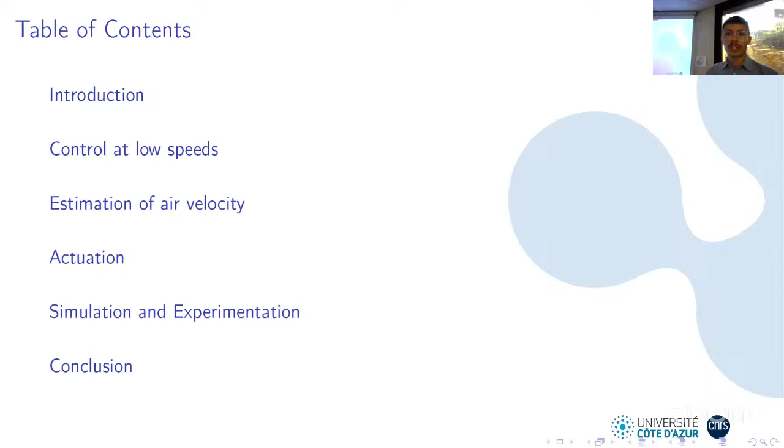This presentation will begin with a brief introduction of the topic we're going to address in the thesis. Then I'm going to give an outline of the contributions, then I'll dive into each one of these contributions. This will be followed by a presentation of the results we obtained along the thesis with a short video. And finally, I'll give a conclusion with some remarks for future work.

So what are convertible vehicles? Convertible vehicles are basically aircraft that can hover like helicopters, but they can also fly at high speeds like fixed-wing aircraft. So they basically use their wings like airplanes in order to generate lift when flying at these high speeds.

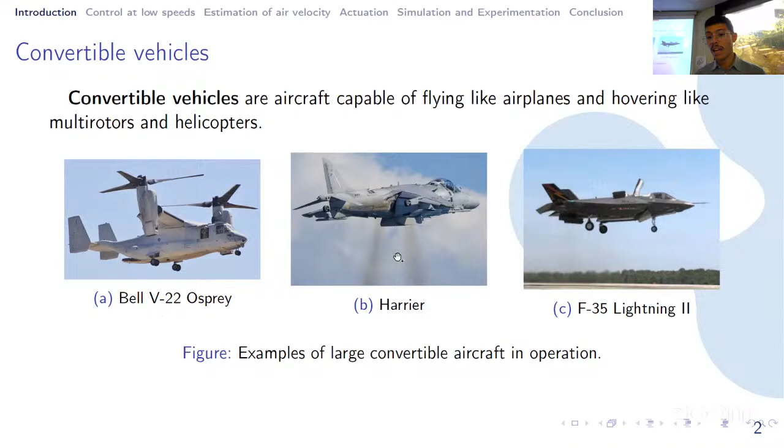These aircraft have been developed since the 1950s. However, very few of them have reached the operational phase. So here are some examples: the Bell Osprey, the Harrier, and the F-35 fighter jet.

Nowadays, with the growing drone market, a large amount of convertible vehicles are now available to the general public. These convertible vehicles come in all sorts of configurations. We can maybe classify three big groups here today.

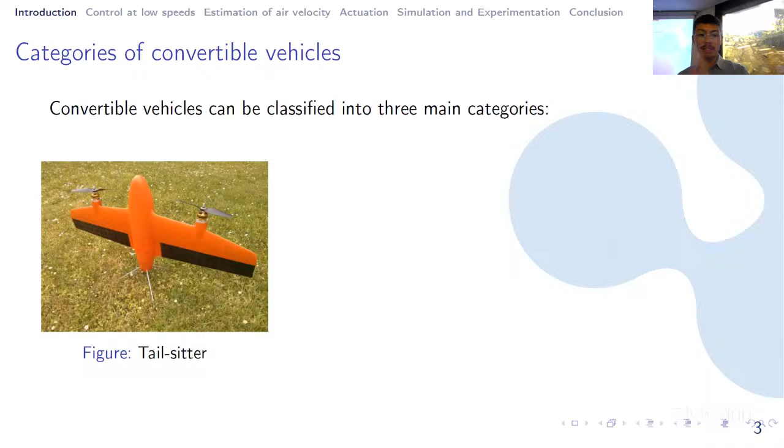This classification will vary in how these convertibles convert from hovering flight to fixed wing flight. Our first group is the tail sitter. These aircraft take off while sitting on their tail in this vertical position, and they convert to fixed wing flight by tilting the entire body from vertical to horizontal position.

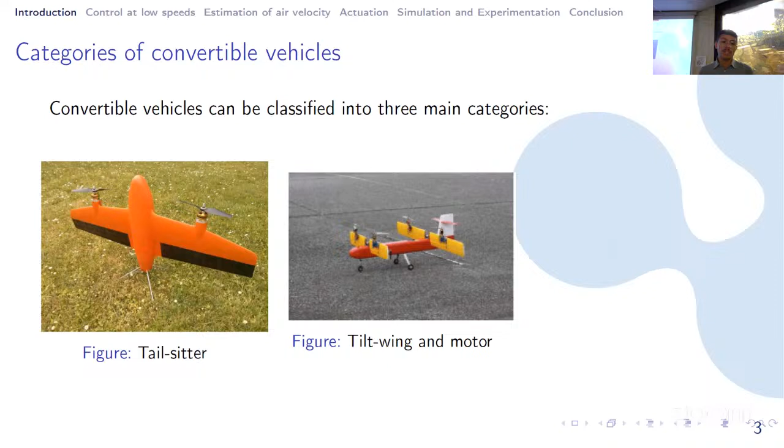Another group of vehicles are the tilt wing and motor aircraft. These aircraft have structures of the wings and motors that can tilt jointly. So they begin takeoff in this vertical position, and then they also convert to the horizontal position. But the difference is that they can keep the fuselage level at all times.

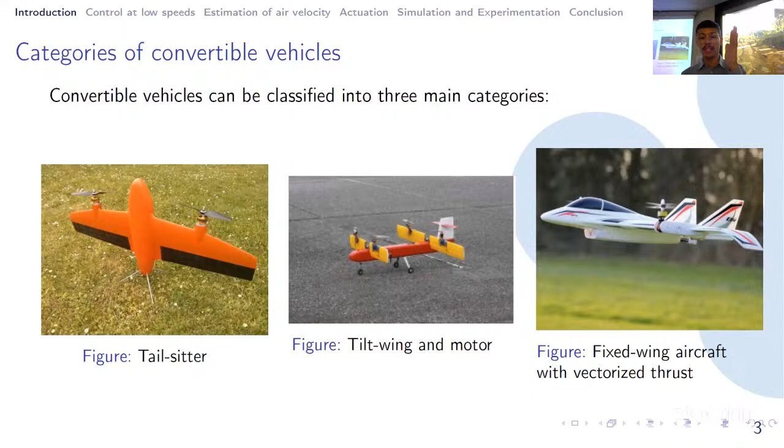And finally, the class of vehicles that we're interested in here today, which are convertible vehicles with vectorized thrust. These are basically fixed-wing aircraft that can produce a thrust vector in the aircraft's vertical plane. To give a better idea of this, a large class of these vehicles are actually tilt rotors, like the ones I have here on the right. These are the drones we used during this thesis.

So what are tilt rotors? They're aircraft that have motors that can tilt, meaning they can change the direction they're pointing to. And the sum of the forces of all of these motors will produce a thrust vector in the aircraft's vertical plane that we will represent here today by this vector T, and it will have an angle in that plane described by this angle theta.

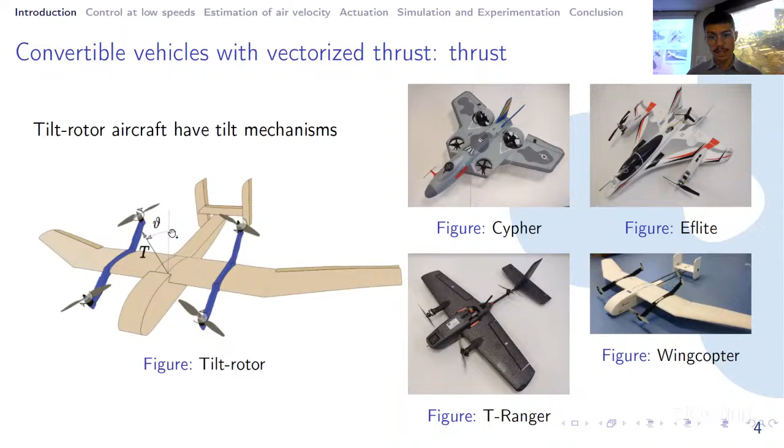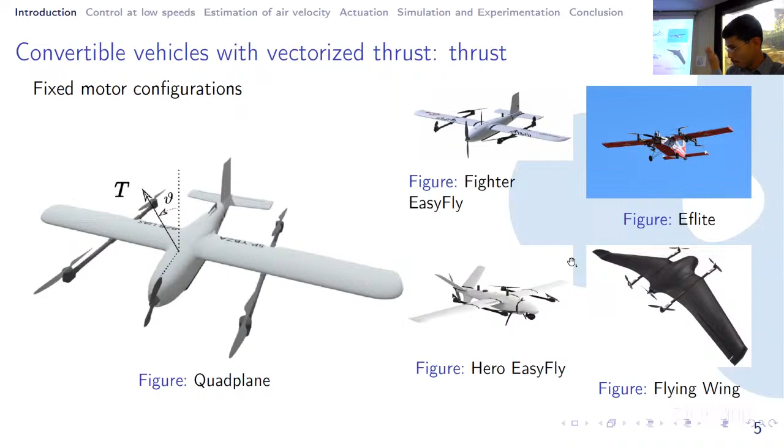Another type of convertible vehicle doesn't have tiltable rotors, only fixed motors, but they're fixed in different directions in the body frame, like the quad plane I have right in front of us today. In the same way, by coordinating the forces of all these motors, we can produce this thrust vector in the aircraft's vertical plane. There are other examples of quad planes that I put in the image you can see on the right.

Other than the thrust force, convertible vehicles also produce an aerodynamic force. Traditionally in aeronautics, this force is decomposed into two orthogonal components. The first one is in the direction of the air velocity, and it is actually opposed to it.

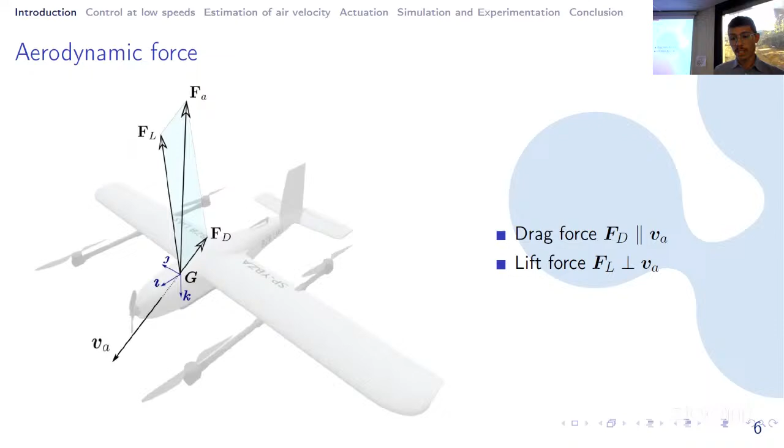So this is the main force component responsible for overcoming the weight of the aircraft while it flies. So among the various characteristics of an aerodynamic force, one well-known one is that it varies with the square of the air velocity, that is, the norm of this vector VA here. And another important characteristic is that it is highly dependent on the orientation of the aircraft with respect to the airflow.

So this orientation is usually described using two angles. A first angle is the angle of attack, which will be quite important for this presentation today. The angle of attack is related to the vertical component of the air velocity in the body frame, this component over here. And then we have the side slip angle, which is related to the lateral component of the air velocity in the aircraft's body frame.

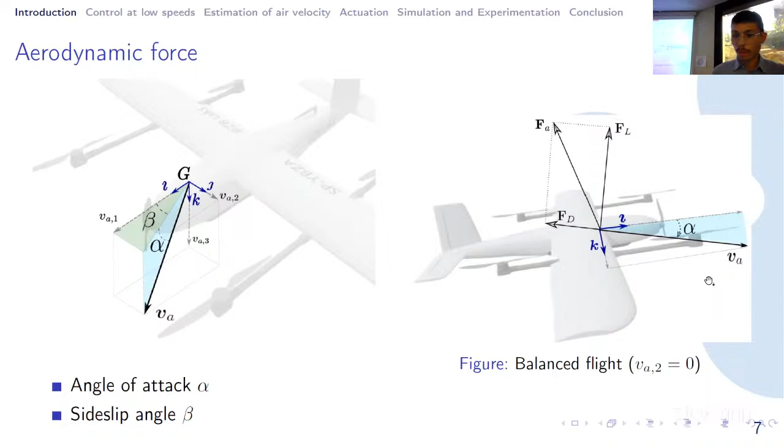Most aircraft with wings are actually designed to fly in a balanced flight condition. In this condition, the lateral component of the air velocity is zero. And while flying in this condition, all of the components of the air velocity and the aerodynamic force are found in the aircraft's vertical plane, as shown here in this image, and they will be mostly dependent on this angle of attack.

So a big topic in the research of convertible vehicles is the transition between the hovering phase and the cruise phase, where we're going to have the wings working to lift the aircraft. Most approaches involve two separate controllers, one for the hovering phase, another for the cruise phase. And the transition is just done by abruptly tilting the thrust vector from the vertical position to the horizontal position.

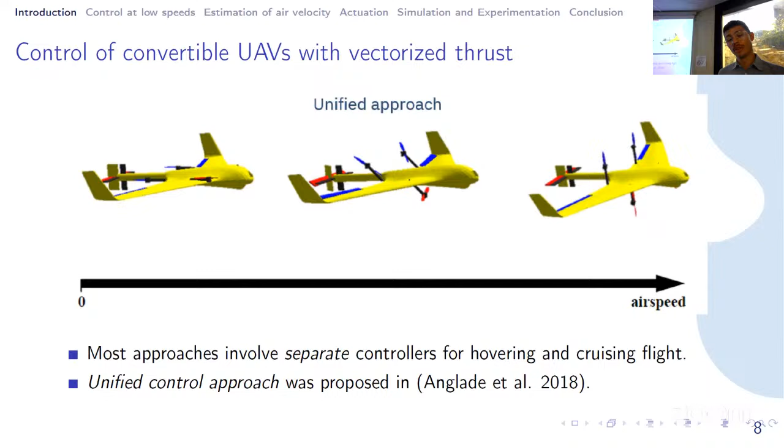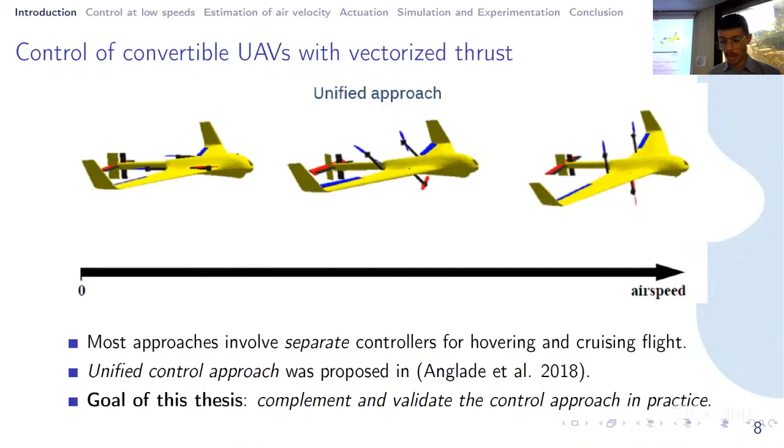So modeling the aerodynamic force for control is quite complex, especially for convertible vehicles, because these aircraft go through conditions that are quite different from fixed wing aircraft. They can be submitted to high angles of attack, and modeling the aerodynamics in those conditions is especially difficult. Another thing is that these models will have other uncertainties coming from the flow of the motors on the wings, which creates a lot of uncertainty that makes it quite difficult to model in practice.

So in order to deal with this, the approach proposed in 2018 here in the lab uses a simplified but yet representative aerodynamic model to model the aerodynamics of the aircraft. This approach applies to all orientations that the aircraft can have. This is quite different from traditional linearized approaches that use the lift and drag decomposition, which can only be applied at small flow angles or small angles of attack. So with this approach, we can have all of these orientations, and it was initially applied to axisymmetric vehicles such as rocket-like vehicles, the ones I represent here.

An important thing about this approach is that it applies well to bodies with symmetry. It considers that the body we're using has some symmetry properties, and that's actually where we get this applicability to all orientations. For example, in the case of a rocket-like vehicle, we can apply this cylinder idealization to make this assumption on the shape of the aircraft. In the case of an aircraft with fixed wings, the idealization used is a disk representation like the one I show here. This disk idealization is used to represent the aerodynamic force of the aircraft in a balanced flight condition.

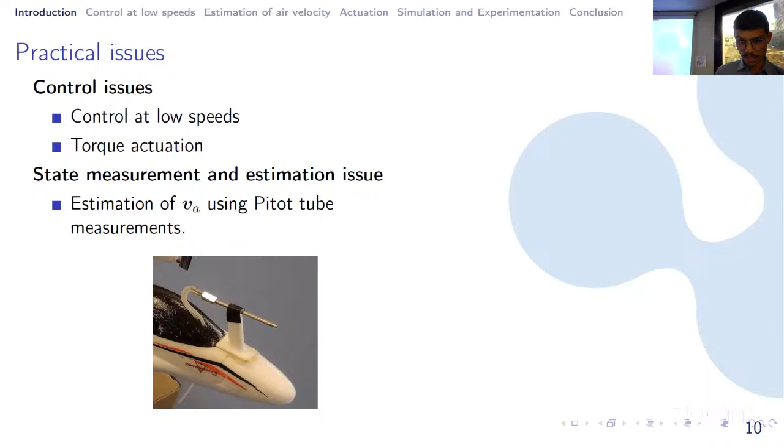As I said, the control approach depends on the determination of the air velocity, so we need to have that estimated or measured on board. Unfortunately, on small aircraft like the ones we see here, they all have this sensor, called a pitot tube, which can only measure one component of the air velocity. That means the other two components must be estimated, and we still needed to analyze better in practice if we could estimate this air velocity well for this thesis.

Finally, one of the goals is to validate the approach in practice. This is usually done in two phases. First we worked out a lot of simulations to evaluate the robustness of the controller, and then in a second phase we take this to flight tests where we really test it in a real-world environment. During these tests, we want to evaluate the robustness of the aircraft, mainly for modeling errors.

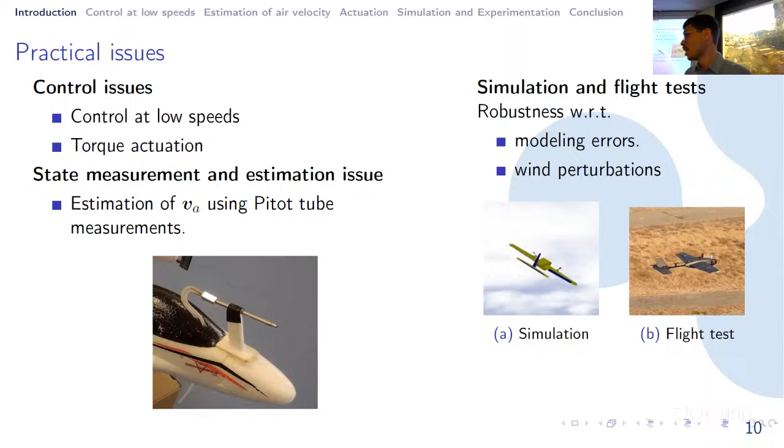As I said before, we're using a simplified model for the aerodynamics. Another thing is that these convertible vehicles go through a large flight envelope, so the conditions of flight can vary a lot. For smaller aircraft like the one we have here, another important thing is to be robust to wind perturbations, since a small wind speed, say 7 meters per second, can really change the phase of flight of the aircraft.

So now to dive into the first contribution, which is the control at low speeds. In order for us to understand it better, I'm going to make a recall of the approach proposed in 2018.

Back then, to simplify this presentation, we're going to assume we have two types of inputs. The first input is the thrust vector of the aircraft itself, defined by this tilt angle theta and this thrust intensity T. The second type of input will be the aircraft's orientation, described by these vectors I, J, and K. The underlying assumption here is that we know how to create the torques to make the aircraft's orientation converge to a desired orientation.

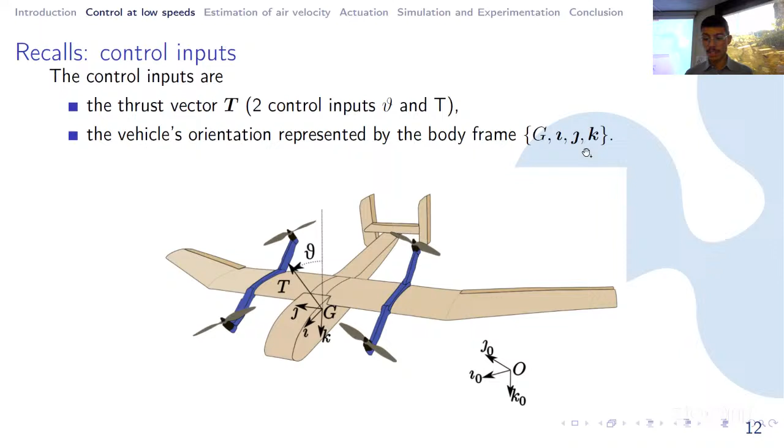Please consider for the next slides that these I, J, and K's here are actually the desired vectors of the desired orientation. So if we write out the Newton equations for a convertible vehicle, we get this equation with the weight force, the aerodynamic force Fa, and the thrust force in the vertical plane, described using these vectors I and K, and the thrust inputs I mentioned before.

If we write out our aerodynamic force, we can see it's decomposed into the three components of the body frame. This is a different decomposition than I showed previously, which depended on the direction of the air velocity, the lift and drag decomposition I mentioned before. For the first component, on the direction of I, it will basically work like a drag component, resisting the motion of the aircraft in that direction. Then we have the second component, on a direction opposite to K, which works like the lift force.

So it will be mainly responsible for overcoming the gravitational force. We're going to have this constant here, C0 bar, and this constant C0. C0 bar will be much larger than C0, because the lift force can actually be much stronger than the drag force. That's why this constant is larger.

Finally, we're going to have this lateral component on the direction J, which is the component we want to make sure is close to zero in order to have a balanced flight. The image that goes with this formula for the aerodynamic force is that disk idealization I mentioned before, in a balanced flight condition.

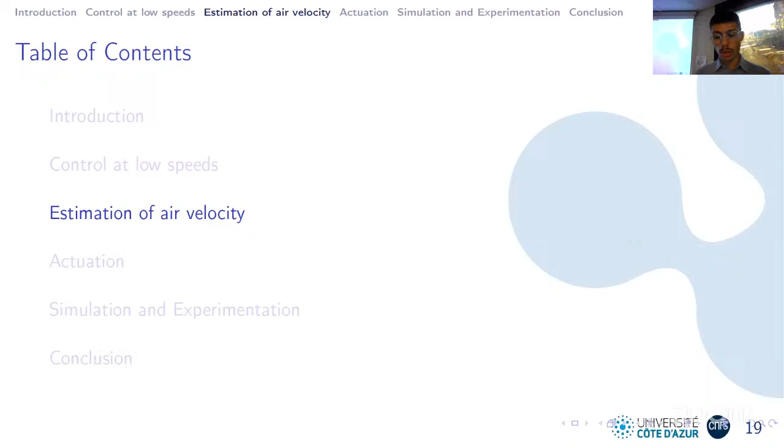So as we saw here, the approach depends a lot on the air velocity vector, so we need to estimate it. In this thesis, we looked into that in order to start this discussion.

One way is to directly measure it using various types of sensors, for example multi-probe pitot tubes or wind vanes. The problem is that most small aircraft like these ones can only accommodate one pitot tube, which will only give us one component of the air velocity. So the remaining components we're going to have to estimate.

There are basically two big types of methods out there. One type is a model-based method, which uses the dynamics of the aircraft to deduce the air velocity. The problem is that doing so requires a high-fidelity vehicle aerodynamic model, which is quite inaccessible for low-cost aircraft like the ones we have here.

Another type of estimation algorithm is a model-free algorithm. These algorithms are only based on kinematic equations. The state-of-the-art methods nowadays use a cascade of observers: a first observer to estimate the inertial velocity and orientation of the aircraft, and this information gets passed to a second observer that combines it with pitot tube measurements while assuming the velocity of the wind is slowly varying or constant. This second estimator will estimate the velocity of the wind, and once we have the estimate of the inertial velocity and wind velocity, we obtain our air velocity.

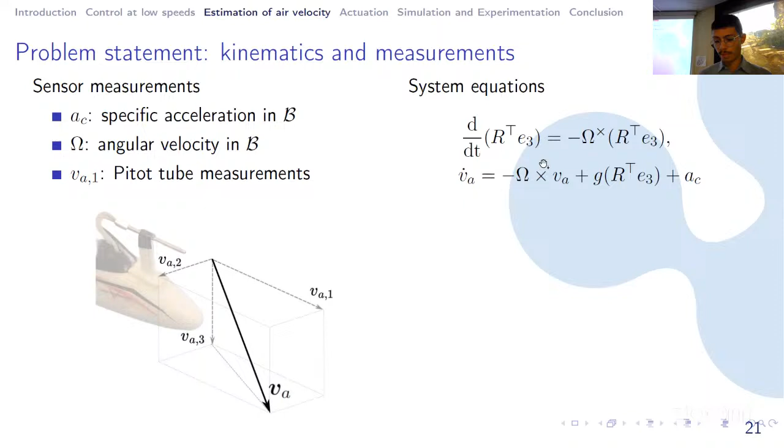When we write R transpose E3, this is actually the orientation of the gravity expressed in the body frame, and the dynamics for that vector can be expressed by this first equation shown here. The observer dynamics can be represented by these equations, which are basically a copy of the system with the correction terms: delta 1, delta 2, and delta V.

The approach we adopted for designing these terms is a Riccati observer design approach. There we can demonstrate that we have a local exponential stability of the origin of the observer errors, but under the assumption that the wind is slowly varying, as mentioned before, and that we have a persistent excitation condition on the aircraft's orientation.

For an aircraft like the ones we have with a pitot tube on the direction of I, this persistent excitation condition on the orientation is basically the motion of the pitch and yaw of the aircraft. But if we had other measurements, say on the directions J and K, we could reduce this persistent excitation to only pitch and or yaw. And if we had measurements along all three directions of the body frame, this persistent excitation condition would no longer be required for convergence of the filter.

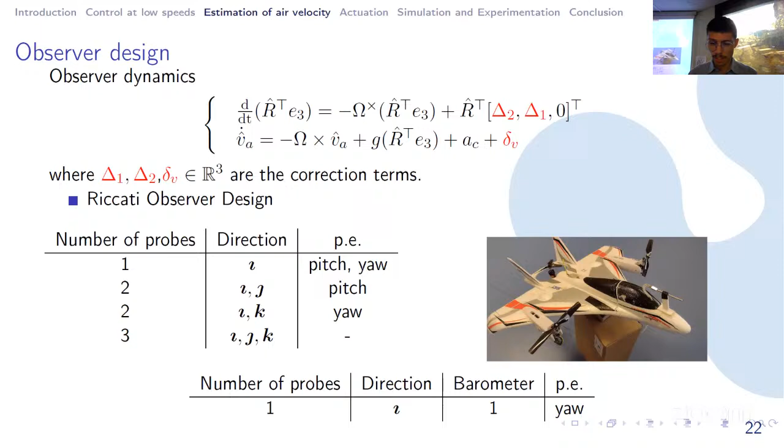This is actually more easily attained in a flight of a convertible vehicle. So in order to test this approach in practice, we evaluated it using data from a flight of a convertible vehicle, and we did that in an indoor environment.

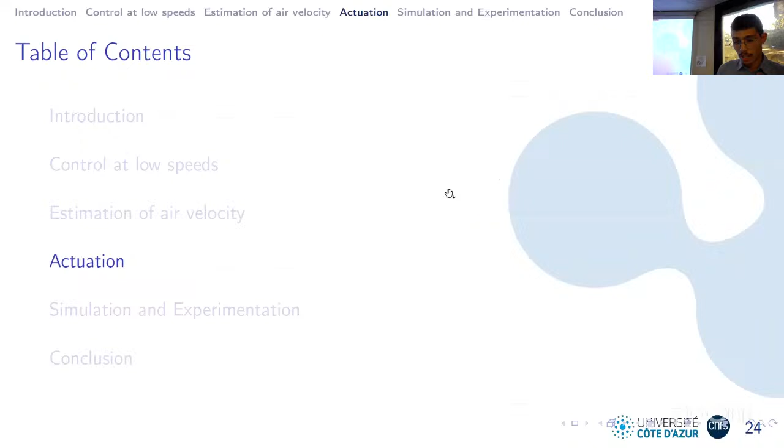Now to move on to the last part of the contribution of this thesis, which will regard the torque distribution, or the production of torque.

We start off by defining a control policy in order to allocate the torque we want to produce to the motors and the control surfaces. We represent by gamma A the torque of the control surfaces, and gamma M the torque of the motors. This is done using a convex combination with a function lambda bar, which depends on the airspeed. The idea is that at slow speeds, we want to use the motors to control the aircraft's torque.

As the airspeed progresses and we get more dynamic pressure on the control surfaces, we start using the control surfaces instead. By using this law, we have a smooth transition in the allocation of authority for producing torque, from the motors to the control surfaces.

Once we have the torque for the control surface, we distribute it among these two control surfaces. For the motors, we did the same for E-flite, taking into account the fact that it has tilts. This was done for all of the aircraft we see here today.

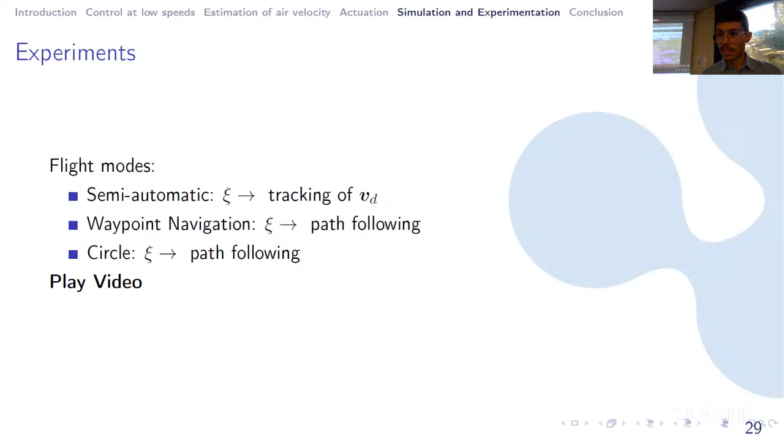Now to conclusion and some perspectives for future work. Recapping, the main contributions of this thesis were basically the extension of the control solution down to low speed, so that we can comprise all flight phases of convertible vehicles with vectored thrust.

Another contribution was the novel observer we proposed for air velocity estimation, which uses a minimal sensor suite and can be used for the flight of convertible vehicles.

Finally, we've been able to validate and assess the robustness of the control approach in practice, applying it in several vehicles. Now some perspectives for future work.

One of them is to continue experimentation on other platforms. We got to test the Cruiser quite well up to now, and we're still working on the Fighter as well, but there are still other configurations that need to be better investigated. We'd like to learn a lot more from these experiments.

Another thing is to investigate methods for tuning the gains. For the orientation, we have a sort of high gain control, and the ideal gains can change a lot depending on the flight regime. For example, the gains we use for control of the control surfaces at high speeds are not necessarily the optimal gains for control of rotation using the motors at low speeds.

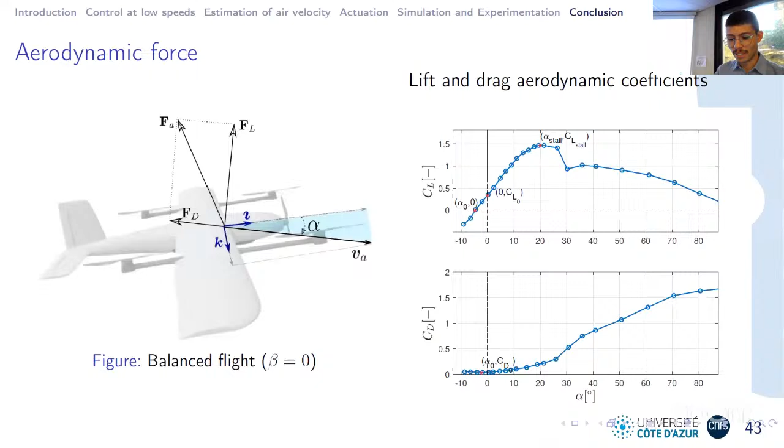But then I see this transition in the angle of attack. Shouldn't they be related or more or less the same in those situations? Yeah, so let me show a similar plot to that one here today, that would probably help.

You showed the results for an indoor flight experiment, I think it was indoor, yes. Can you give a little more detail about how this experiment was done to check, or how did you obtain the ground truth for comparison?

Yes, so we did this indoor flight experiment with the E-flite aircraft over there. On it we had the PX4 control system, and in it we have an estimator for the aircraft's inertial speed and for its orientation. So having the data from the sensors, we could test our algorithm and compare it with these estimators.

The goal there is that since we're in an indoor environment, we can reasonably assume the velocity of the wind to be 0. So the air velocity can be compared with the inertial velocity. I must say we were kind of lucky in that experiment because we got GPS measurements even though we were indoors, in order to verify, or at least have some guarantee, that the estimate of the inertial velocity actually makes sense. I compared it with the measurement of the pitot tube, and since they were quite close, I said this can then be used as a proxy for us to evaluate the observer.

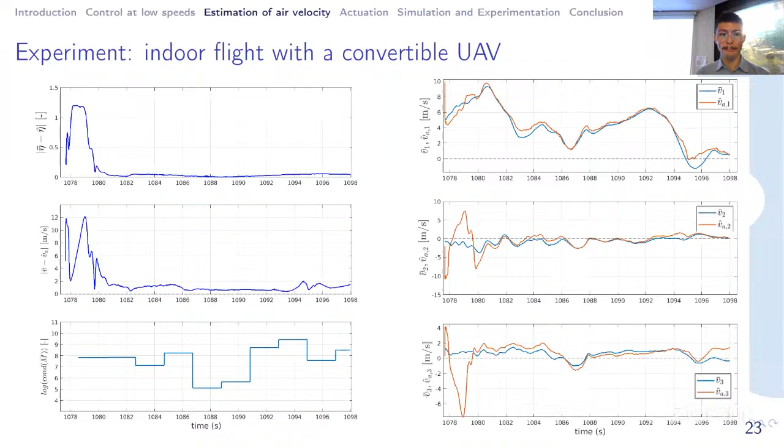About the experiments, I think it's impressive what you've done, both on the simulations and all the modeling involved, and then going for experiments with not just one vehicle but several different ones, to really showcase and demonstrate that this can be applied and you can obtain good performance. But it puzzled me that the simulation models - I think you talk about 5 or 6 simulation models - don't match the real vehicles. I got that impression, but maybe I'm wrong.

So don't match it in what sense? Sorry, it's just... They're not the same. It's not the same motor, the same fuselage, whatever.

Yeah, I mean indeed. If we could actually have a much more powerful simulator that could really model well the aerodynamics, that would be another option.

I would say that the approach we do for simulation is still a very simple one. But the main goal was to really be able to test the robustness of the controller against effects that are not in the control model, so we could assess some things before going to flight experiments. Even with these simplified models, we could deduce quite interesting things and get some idea of the gains before we fly. So it's still a much simpler model than we'd have in other simulators.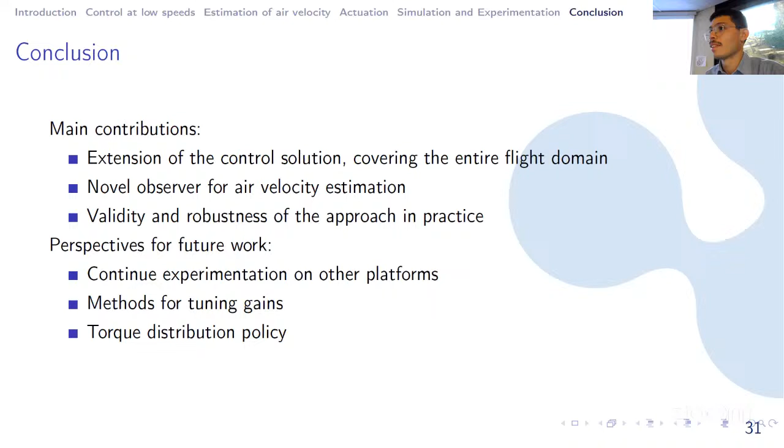Okay, so we have a few more questions on control, more on the core of the contribution. If you can go back to slide 42 - maybe the main slide, sorry, slide 42. I have 42, maybe it's 24. Oh yes, no, later.

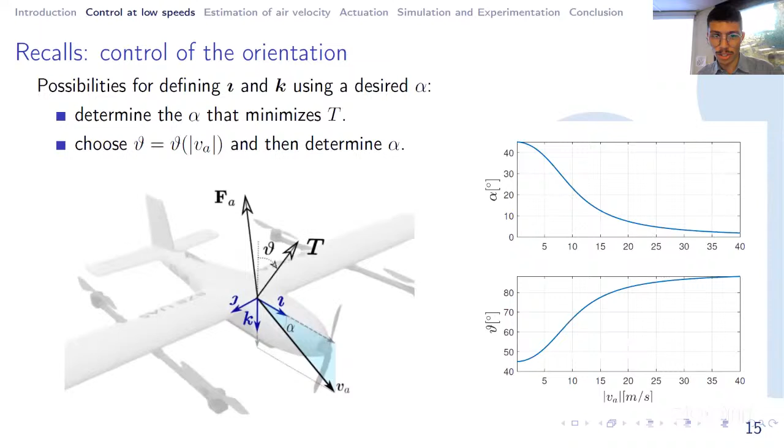Later, later. So after this one it's the end. You don't have an extra slide. Anyway, so that's not very important. You can stay here.

So am I correct that at very low speed you control the pitch, and after some threshold on the air velocity you control the angle of attack? So it means that in theory you can have discontinuities of the desired pitch angle, right?

Yes, the desired angle of attack. Well, yeah, or sorry, the desired pitch angle. So is it something that you encountered in practice?

Can it be a problem? Would there be a way to avoid this discontinuity? So just to be clear, to avoid the singularity I had before? It's not a singularity, it's a discontinuity.

Going from this low speed control to this high speed control. Yes, basically when you start controlling in angle of attack instead of controlling in pitch. Yes, I see.

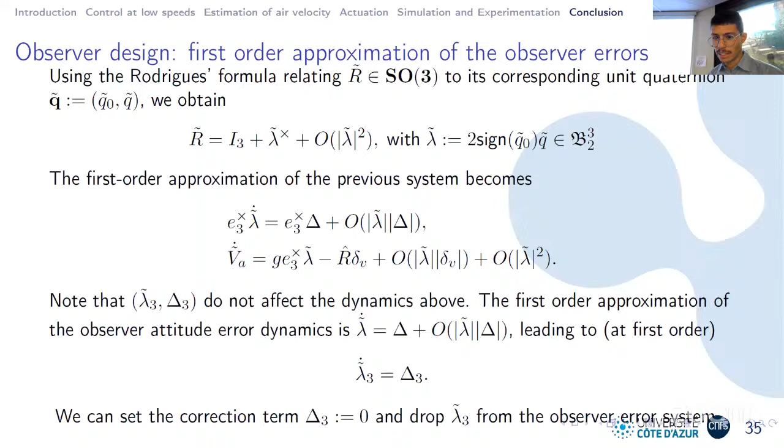Maybe if I come back to this graph I had before. So at low speeds, the pitch equals 0, right? But as soon as we can have this balanced flight condition again, when we add the second vector j to align the aircraft to the balanced flight condition, we start computing this associated angle of attack. Once it gets out of that zone, it will continuously change from the low speed angle of attack to the high speed angle of attack.

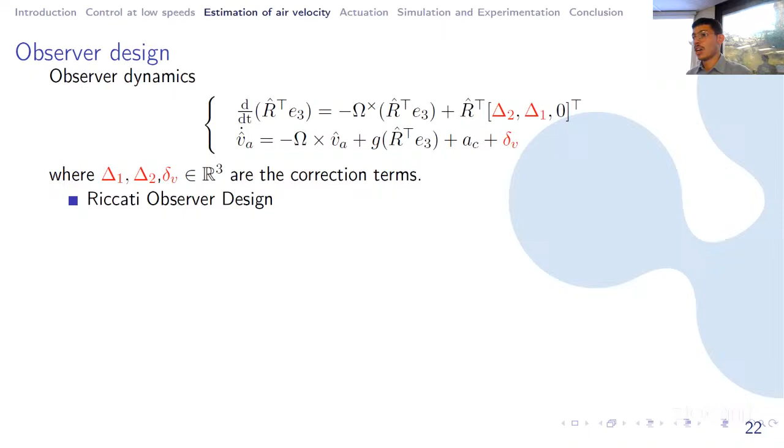Another practical question: at low speed, the yaw is free, right? Yes. So for example, with this aircraft, if there is some wind, it will naturally align, nose pointing toward the wind. Remember, we're in the neighborhood of the singularity, where the air velocity is 0.

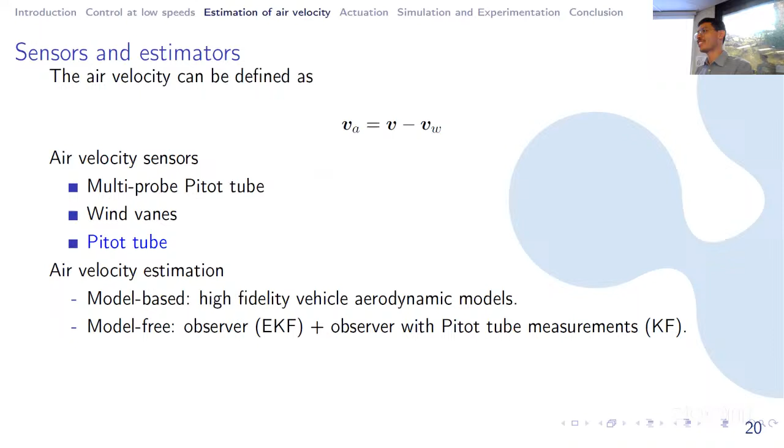So if we have a gust - not always exactly, but indeed if we get surprised by a gust, the aircraft will... there's a little bit of wind before you start controlling in angle of attack. There's still some zone in which your yaw is free - a short zone where the yaw will be free.

And for example, if at this moment you decide to fly toward the wind - not with the nose in this direction, but at pi radians - you want... not orthogonal to the wind, sorry, in the direction of the wind. Not facing the wind, but with wind at the back.

I'm sorry, I didn't really understand. The wind on the tail, so blowing from behind. Oh okay, so if we had the wind coming from behind, if we want to fly in that direction... I see. So basically, how does it work? Can you explain a little bit how it works in this case?

It will all depend on the velocity of the wind and the velocity of the aircraft. Say, basically, you're stationary, you have 2 meters per second wind blowing from the front, and then suddenly you decide to go back. So basically you have a reference velocity which tells you that you want to go in the same direction as the wind.

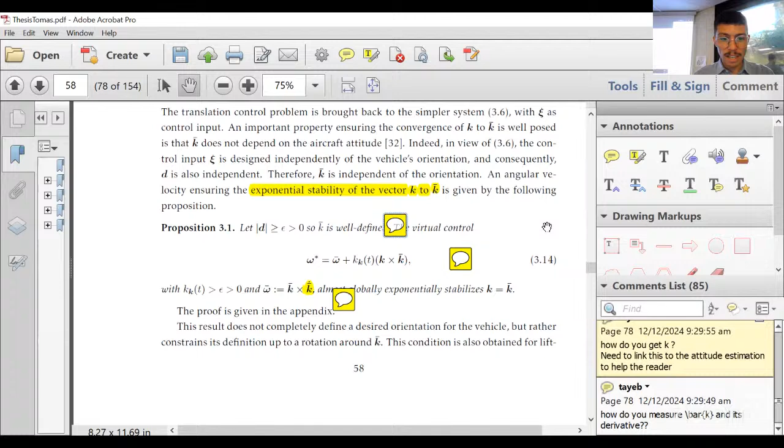So in this control here, okay, so you're using K and K bar, okay, and then you have omega bar that depends on K bar dot, okay. Now I was wondering how do you get the K bar dot? So if we go, the K bar has a definition, right? That was given a bit before there, which is the expression that we use for the desired K bar. And the K bar dot, actually, we can obtain it using a...

So K bar is basically D over, exactly, that's the direction of D. And your D depends actually on the acceleration. And so, you know, it requires some derivatives. You need to differentiate the acceleration and things like that, right? Yes, yes. So that's what you do? Yes, yes. So in an implementation, we basically differentiate the measurements of the accelerometer? No, it's not really the accelerometer in that case. It would be no, this is the accelerometer and the velocity, right?

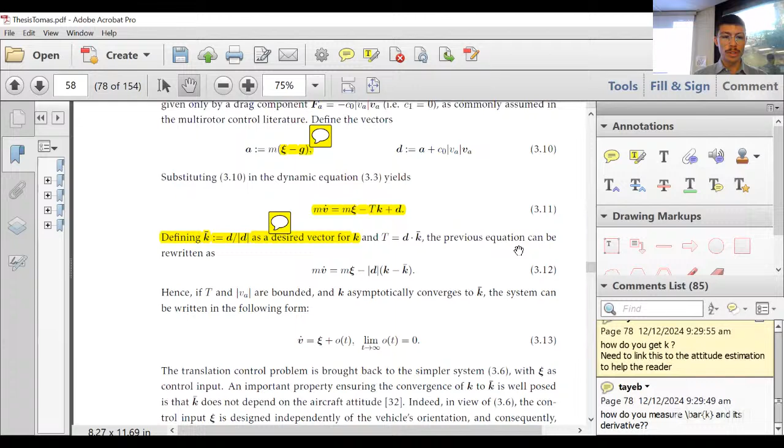No, actually on your left there's a equals to m xi minus g. So the xi is the control, the PID control that we design in order to control the translation of velocity. So it's an auxiliary control vector. And well, g will be the direction of gravity, its derivative will be 0. In the case of the air velocity there, yes. So you're differentiating this? Yes, we're going to differentiate that. But Xi is the control. How can you differentiate again the control? Well, so the control would be basically we'll numerically differentiate our PID control, for example.

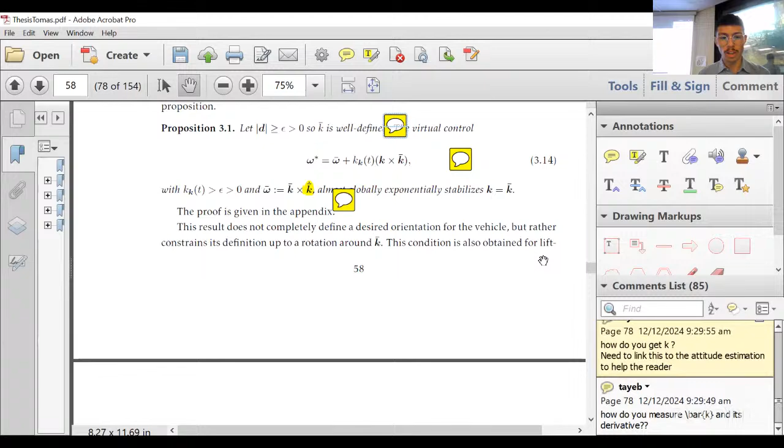Okay, another thing related, that I see here, in your control you don't compensate for the gravity, right? So you use the integral to overcome the gravity. Is it correct? No, actually, this minus g that you see there is actually this compensation of the gravity. So no, in designing this Xi, okay, you don't compensate the gravity. Because you know, if you go to in designing the Xi, we don't. You don't compensate the gravity in designing the Xi. So basically, if I understand, you include all the perturbations, including gravity, and then you hope that your integral action would compensate those perturbations, right?

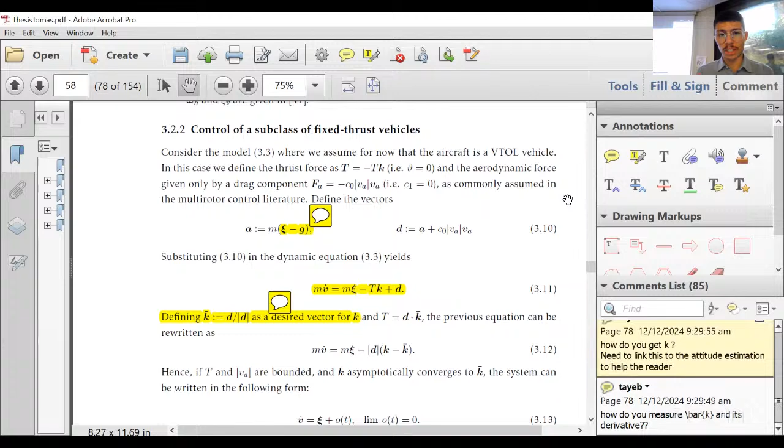No, wait, so let me just be clear. So that minus g there, that's inside the vector A. It's compensating actually the gravity action. The Xi is only used to design the control of the problem v dot equals to Xi. So the control 3.7 does not compensate the gravity. So you have just, you hope that this integral compensates the gravity? No. So in order to arrive at the equation V dot equals Xi, we actually already compensated the gravity by setting the thrust inputs to the values depending on A, D, and E. Okay, if you let me share for 3 seconds. Yeah, go ahead.

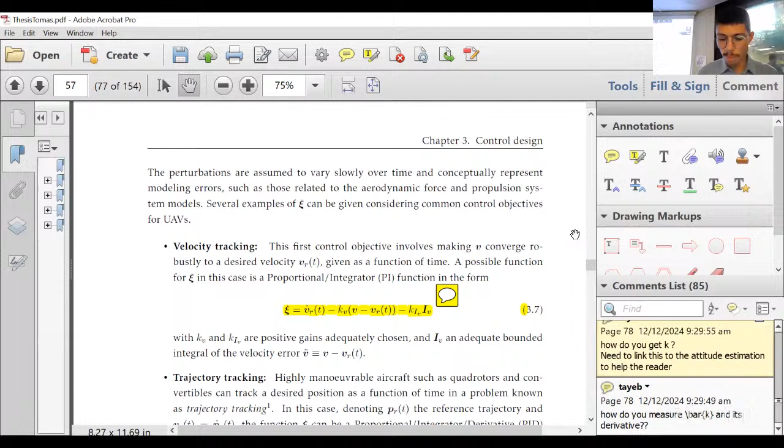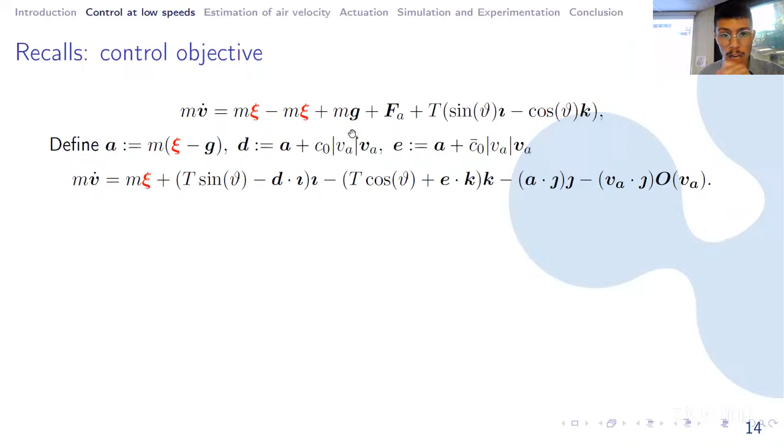Let me go down to the presentation here. So if we go back to this slide, here we have the equations of dynamics. We substitute our aerodynamic model, and here we see the gravity direction. Actually we can rewrite the same system as before. We depart from this system where we did not change anything, we just added and subtracted this auxiliary control vector. And if we define the thrust inputs by these expressions depending on D and E...

So you see D and E depend on A and depend on the gravity direction G here. So actually the compensation of the gravity direction is happening inside of this definition of the inputs of the thrust and the vector J over there.

Zero velocity, zero angle theta, and check that T is equal to mg. In that case, the thrust compensates directly.

If we look into these inputs here, we're going to see that the gravity will be compensated. It will be inside these inputs, right? Okay, it's somehow encoded in there. It's from the first equation anyway.

If you look at the first equation, m v-dot is equal to m Xi minus m Xi plus mg and so on. You keep the first term Xi and you put the other terms equal to zero, and you see the gravity is already there. It's just a way of explaining it.

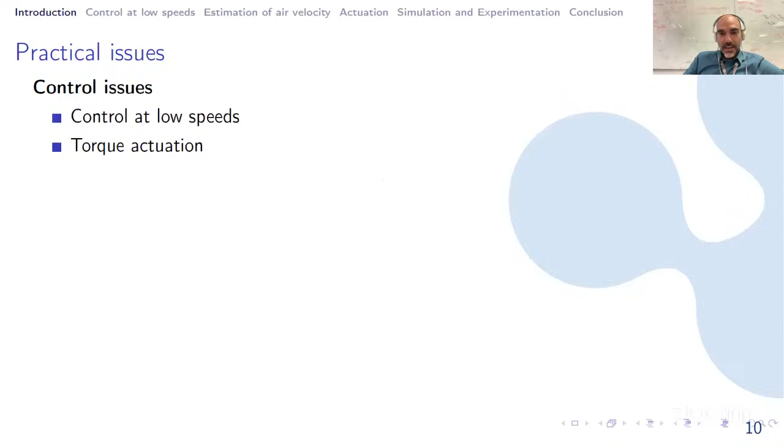Being the last to ask questions, many of the questions I wanted to ask have already been addressed. But I wanted to come back to this topic of models, specifically the model part and the estimation of the aerodynamic coefficients. I think this was touched on by Pascal, but if I understood correctly, you did not estimate these coefficients using your own data, right?

Yes, we tuned them, but not through an identification procedure really. Okay, besides the specific identification of the coefficients, did you by chance also evaluate the residuals? Because your model is composed of coefficients, but there might be other components of the model that haven't been taken into account. So did you take a look at the residuals with respect to the models rather than the coefficients themselves, or was this not done? Just curious.

In the beginning of my thesis, I did evaluate a bit what the model would predict in terms of aerodynamic force compared to what we'd get from the accelerometers. I tried to find something out of there, but with the amount of data I had, it was still not enough to do a good identification on that side, at least not in an easy way. So I really didn't follow that axis during this research.

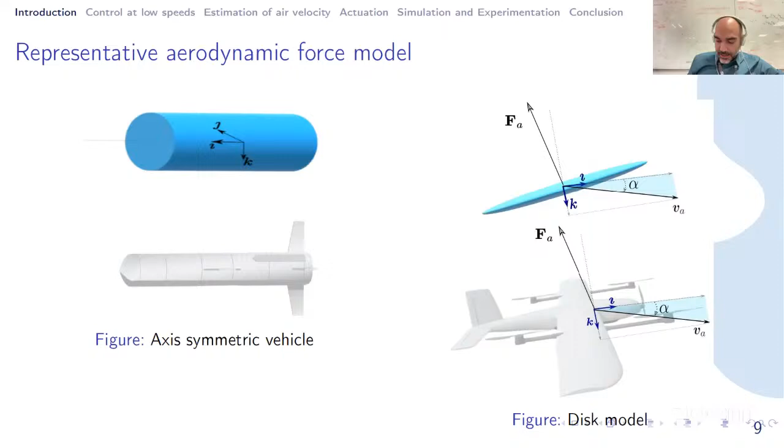Okay, don't worry, I was just curious if you took a look at the residuals. So then, if you can go to slide 26 - yes, because I was intrigued by this study, which is also related to the other point I wanted to touch, which is induced velocity.

But you already answered that. I don't know if you can tell us a bit about your practical sense of how much the control surfaces would change the main expression of the aerodynamics itself. Because here the control surface is changing the lift and the drag. What is your feeling about this - how important is it that the next student should take into account the relationship between the control surfaces and the main aerodynamic effects, in terms of torques and forces? I just want your feeling on this.

As far as the control model goes, we do not take into account the change that the motion of the control surface has on the model of the aerodynamic force of the aircraft. Because in theory, when we deflect a control surface, we're actually also changing the zero lift plane of the model. This effect is not really included in the model.

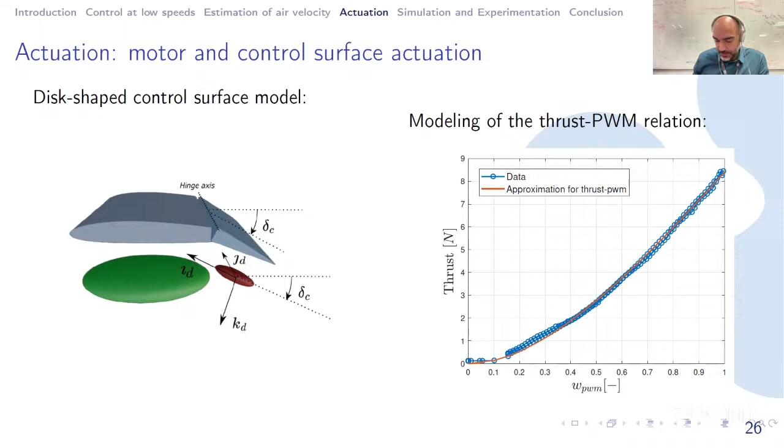Yeah, so indeed, when we apply these models with the discs and the fuselage, we're taking into account the superposition principle. So we're not taking into account interactions that we know actually happen between the wings and other surfaces, and also the motors and the aerodynamic surfaces. This is well documented in aeronautic engineering, and it's something that's taken into account in dynamics models of airplanes.

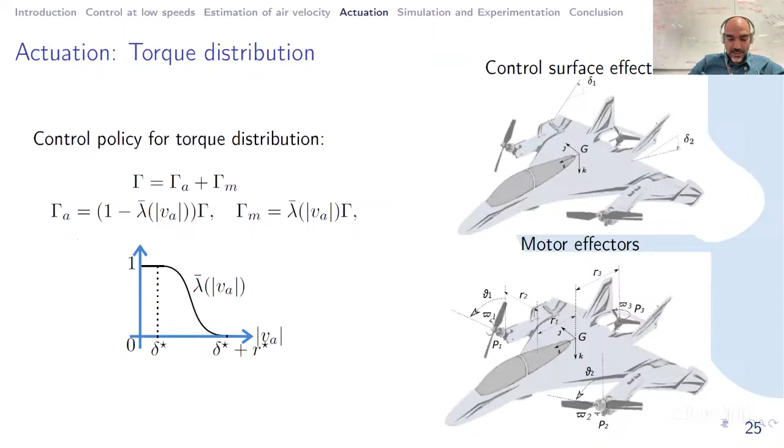So another question I had was concerning the control. Can you get back to slide 13? Apologies if I got it wrong. Yes, so please tell me if I got it wrong, because I might say things that aren't really correct. Basically, in the longitudinal dynamics, in the plane, assuming you're moving the plane, you get two independent inputs: the total thrust and theta. This allows you to feedback linearize the XY dynamics, and then with the angular velocity, you try to zero the lateral component.

Is this the sense of the controller, or is this the underlying property of the system? Yes, I would say that that's...

In high level speaking, it's really the objective, because we want to eliminate the angular velocity or the control of the orientation of the aircraft. We want to eliminate this component, and put all of those external forces in that plane, where we actually have a degree of liberty.

For the thrust input, we can actually set it in many ways with respect to the body frame. So we could choose the thrust with a tilt angle at one value, but we could also choose another tilt angle, which will give us another orientation for the aircraft.

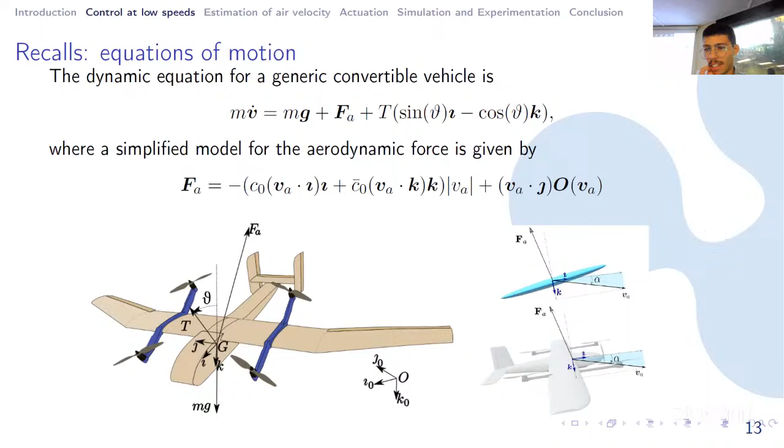Also the value E in the controller, which clearly then brings theta a little bit to the border. So I don't know if your feeling is that predetermined trajectories might help in getting away from possible singularities.

Yeah, let me think. Well, a predefined trajectory could be interesting, for example, for evaluating if we would reach saturation of the motors or something like that.

We try to control the aircraft in order to have a small angle of attack, but it could happen that a given trajectory will have a large angle of attack at a higher speed. Usually the high angles of attack happen at low speed. We can't avoid that, and it's not really a problem because the aerodynamic force won't be large at that phase.

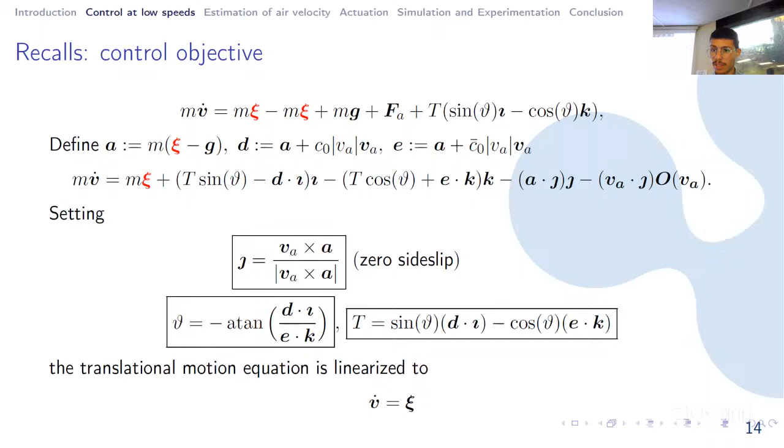The model is actually more precise, and we tuned it in such a way that it's more precise at low angles of attack, because we can actually compute the C1 coefficient, the one used to compute the C0 bar. I actually have a slide for that.

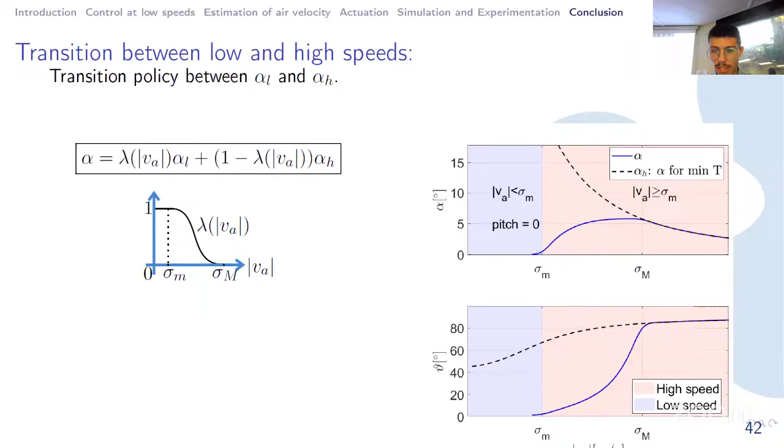So yeah, we would like trajectories that would fly in this zone as much as possible, especially at high airspeeds, in order to avoid issues, because we know the control model will work better at that phase, in this zone of the angles of attack. So flight planning could probably help us do that and also avoid saturation of the motors.

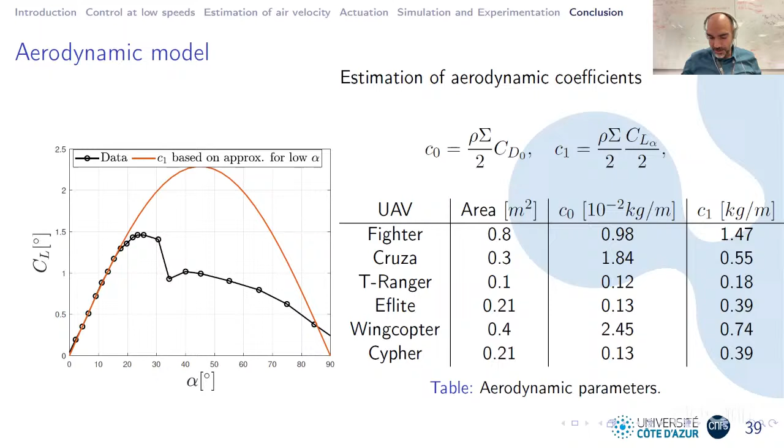Very quick, answer in 2 sentences. So think about you're flying, this is your wing, this is your propeller. So you start increasing the speed forward, you're going to tilt probably the motor. At the point you're going to go up to, let's say, maybe 80 degrees. This is what I have seen on most of the flights, I have never seen 90. Would your controller be capable of doing it more than 90 in order to give lift possibility to the wing portion so that you will fly efficiently with these vehicles or not?

That's the one question. Just so I make sure, basically saying, will the controller at some point become completely a plane, in the sense that we have the motors forward, even positive, because if you put the motors more than 90, such as 95, that will give you the possibility to tilt angle of attack of the wing positive, so that you will start generating real lift with the wing portion and start flying efficiently. Or will you be really limiting the motors up to 90 degrees and never putting slipstream more than, let's say, zero angle of attack?

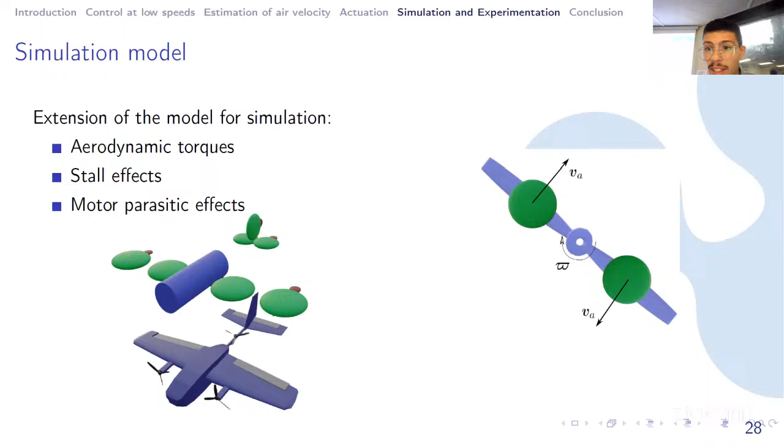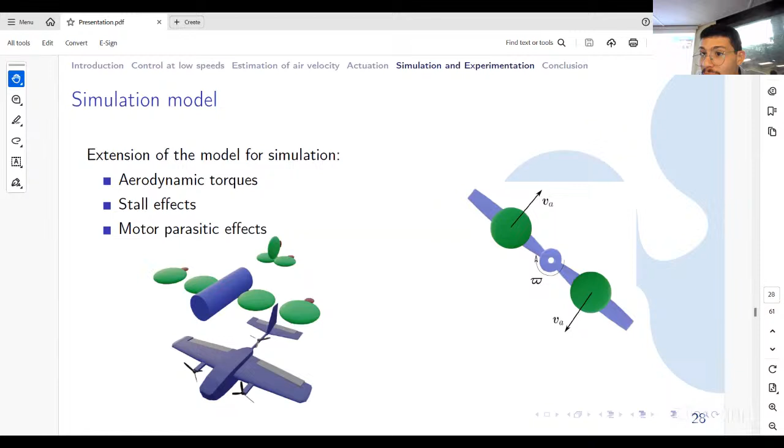Actually, I'm just gonna... oh, I found it here. I'm just gonna cut the live stream because...